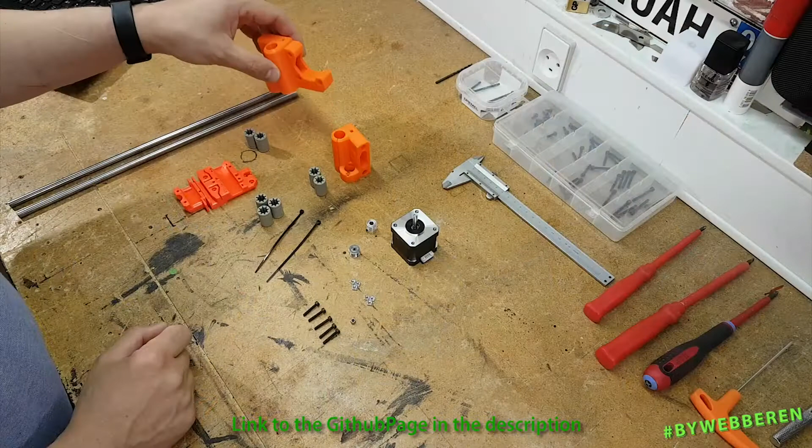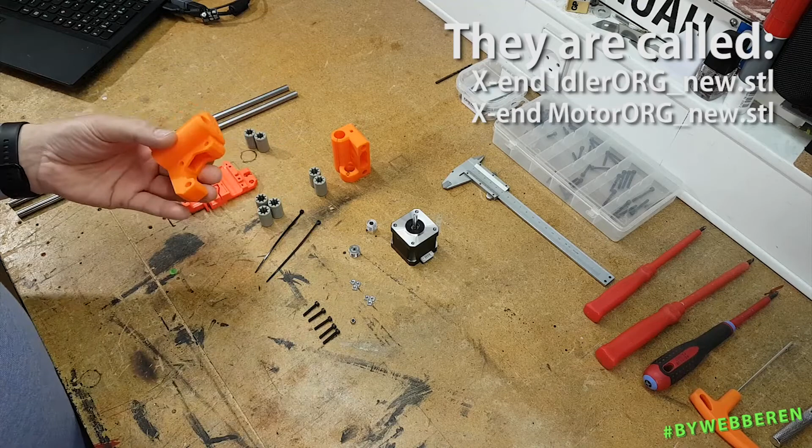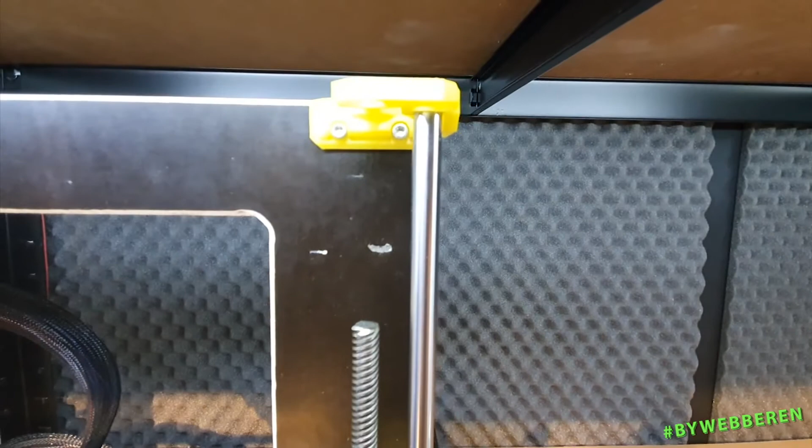I want to mention that these parts are the newest versions, just redesigned yesterday. On the original DADSON Prusa, the first one, the yellow one, I've used these. The difference is the mounting of the brass nut, which on this version goes in through the bottom, simply because my lead screws for the first version weren't long enough. But for this build we got the correct length of lead screws, so we don't need to use these old versions. These are the ones we're going to use today.

Unfortunately I didn't have enough of this kind of orange color, and I gotta tell you, it's triggering my OCD like crazy, but it'll just have to do. Oh, we need that part. So we're gonna put this aside.

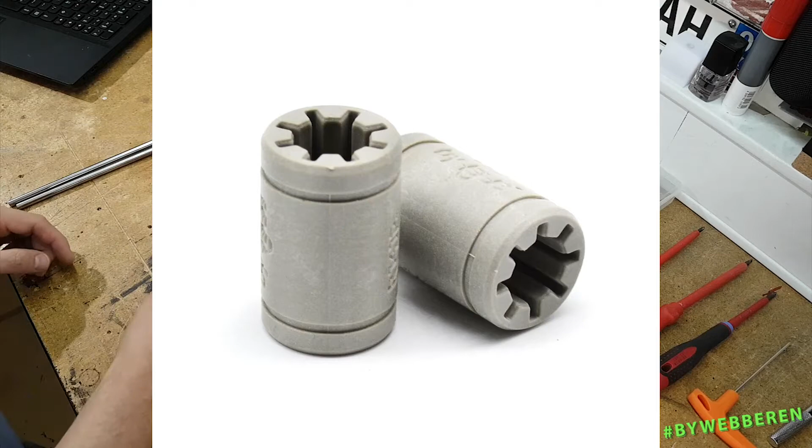I've decided to try and make the entire orange DADSON Prusa with the IGUS drylin, but of course you can also use these, the normal linear bearing versions. It's totally up to you. I might end up going back to these, but for now I'm going to try these original IGUS drylin bearings.

Okay, for the X-axis we will jump to step 2 and make sure we have it all, these two. For these, let's put everything else aside for now. The idler, one of the M3 18mm, and of course the nylock self-locking hex nut. If you notice, these have a kind of a lip on the top piece, which is of course the bottom piece.

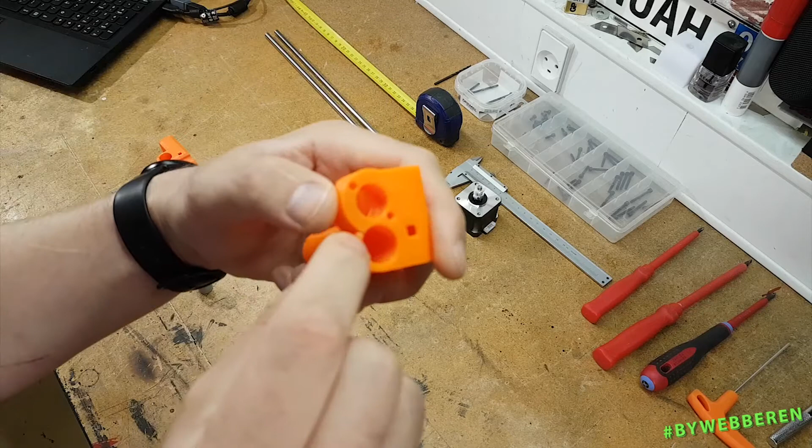Don't try to push the linear bearings in that way, you're gonna destroy the part. They go in from the side they are printed on. Also, there's a little piece right here that I just removed with a knife to give it some wiggle room in this piece, which is obviously what's locking the LM8UU bearings down.

Okay, I want to do this the best way possible, so I'm gonna take the actual rod that's gonna be used, push the first one almost to the bottom, make sure it's sitting tight, put this through. Now what I want to do is make sure that this, when it falls down, goes straight into the hole. That way I know that my alignment is correct.

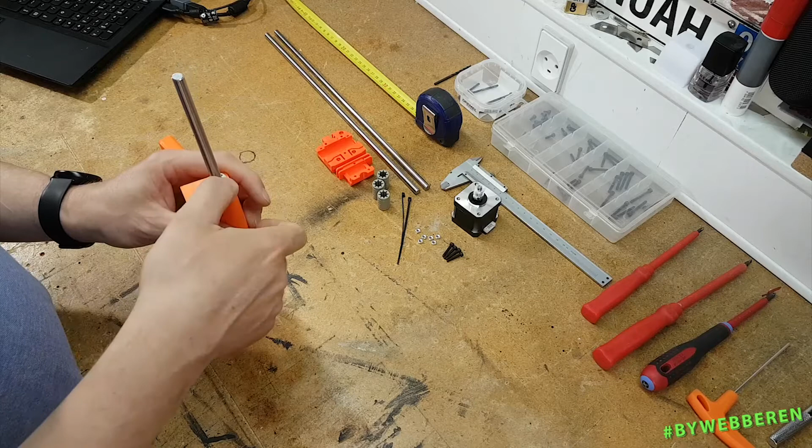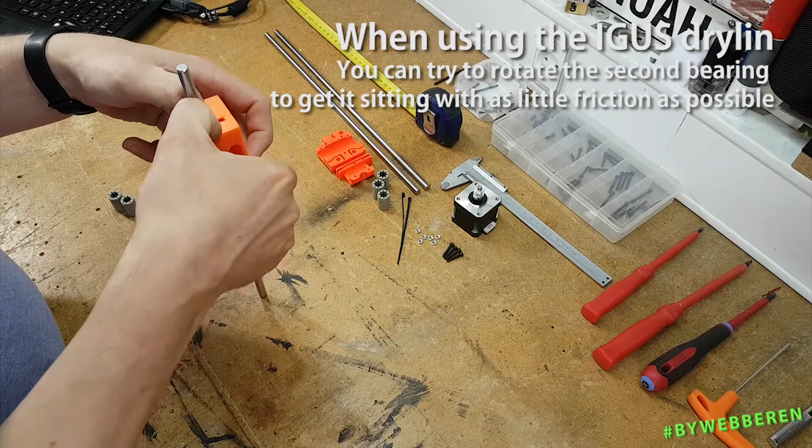Yeah, it moves, you can try to rotate it. Oh, that actually worked. If you rotate and find a better spot, keep it there, put it in. Yeah, that's very nice, and I don't have any problem getting it on and off. So that's one.

Same thing applies to the other one. Push the LM8UU bearing to the bottom. Give it just a light squeeze so it doesn't get squeezed too much by this piece right here. Very stable, yeah. Okay, so that's the bearings in.

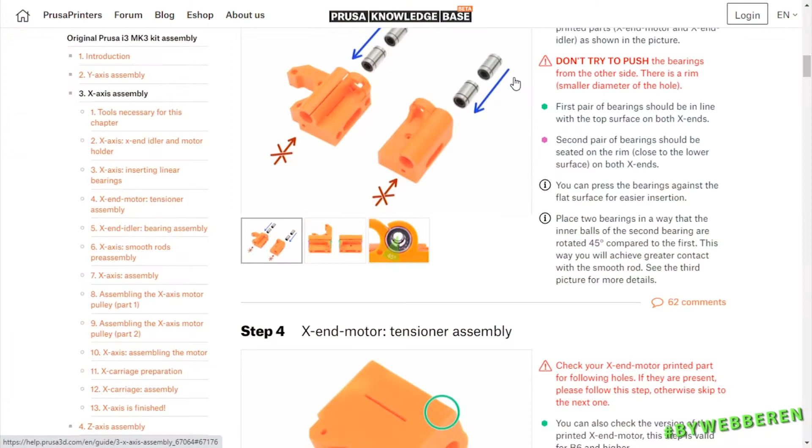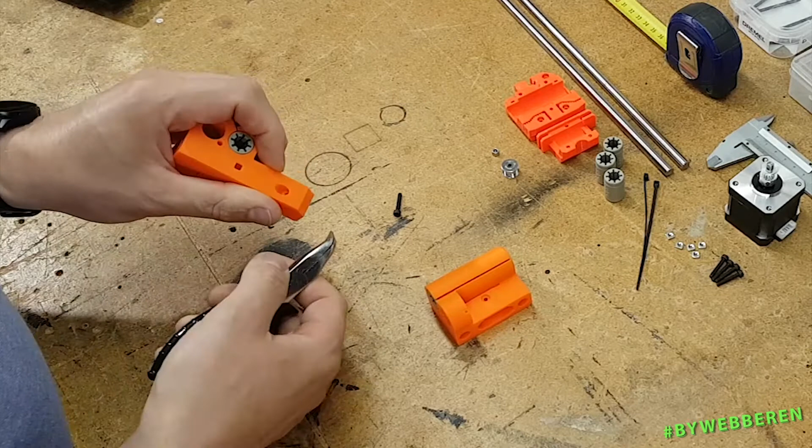Okay, so we are going to prepare the motor piece, the motor mount piece, and one of the 18 millimeters and one of the square nuts. Yeah, there it is. You need to push this in as far as you can, like that. Then it will line up perfectly with the hole for this 18 millimeter M3 bolt.

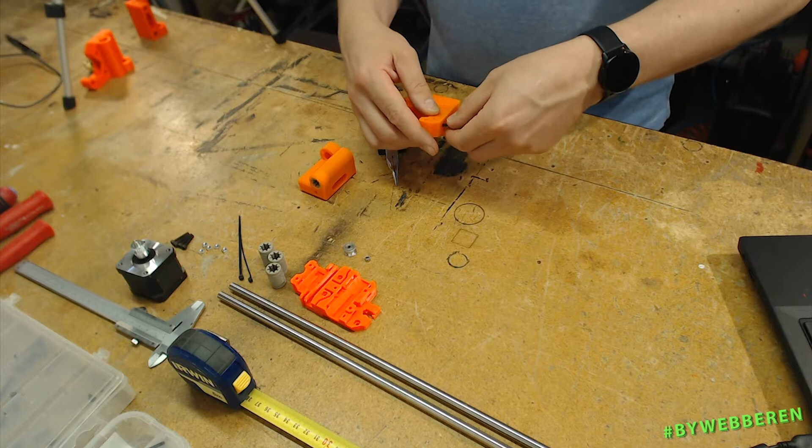Let's just make this ready for the motor tension. You can barely see it in the hole right now, so just one more step.

It's time to work with this one. We need the nylock nut, goes on this side. Oh, before I forget...

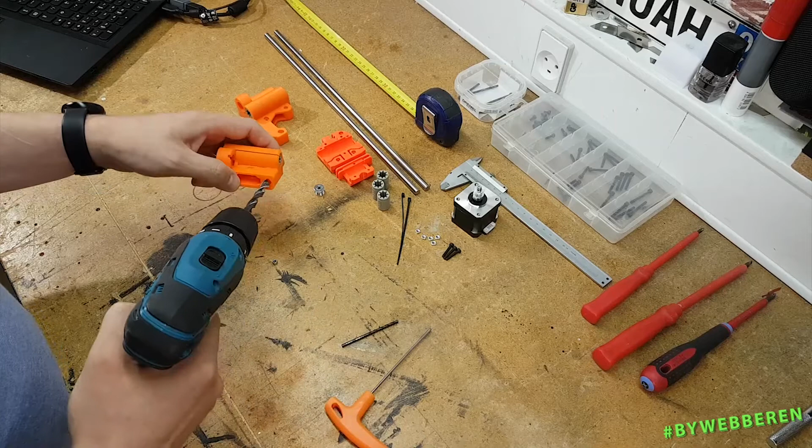When you print any of the parts, it can be a good idea to drill them up. This is an 8 millimeter drill, which has been used for these holes where the rods go, simply because it's not easy to print a perfect round hole when it's in this orientation. So it can be a good idea to just drill it. Don't overdo it, because you don't want to make the holes so big that it wiggles in there. But I am going to take my 3.2 millimeter and make a hole there.

Just a quick tip: if you can't get your self-locking hex nut to secure in this part, you can use your soldering iron. You can just use a normal M3 hex nut, put it in as far as you can, and then melt it in the rest of the way.

Be sure not to burn anything on the part, and just let it sit.

Then afterwards we can just pop it out. Like that.

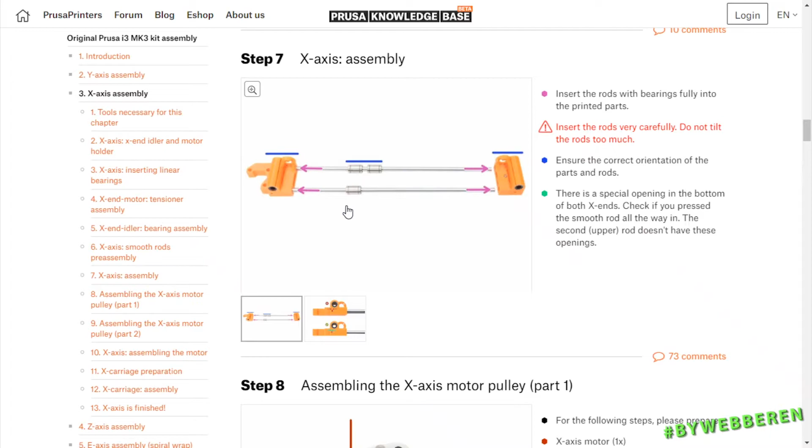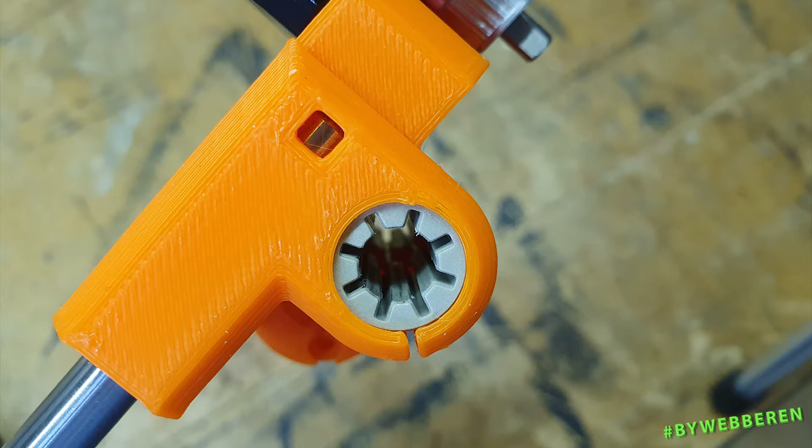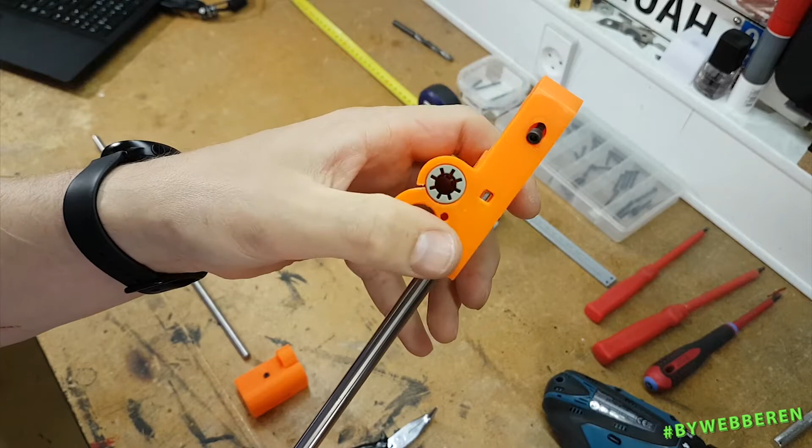On the original of these parts, there is a hole in only one of the sides, which I don't really understand, but I made holes in both sides now, so you know when it's all the way in, and you can see the rod through the hole. It's a clever thing, I know.

See, this is all the way in.

Okay, now I need to remember to make sure that these go on correctly.

There you go. If you decide to use a hammer to put these on, be very careful not to crack the printed part.

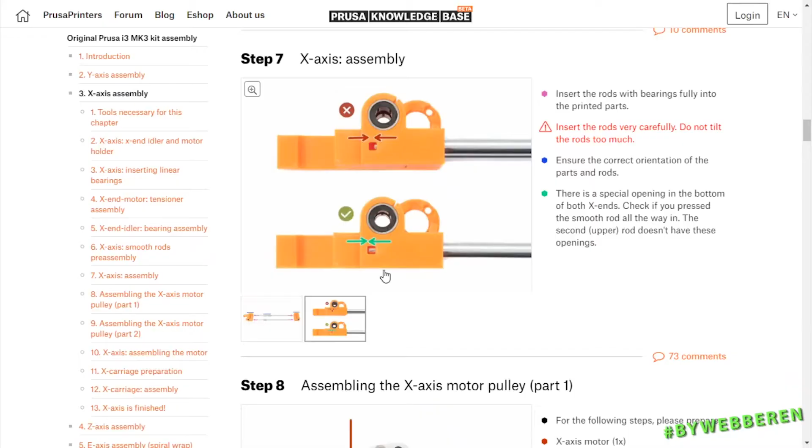Next we need the stepper motor. Oh, and the pulley. You should always go for stepper motors that have a flat surface on the shaft. That makes it so much easier when you mount stuff on them.

Mount this and don't put it all the way in here, which makes sense. This, like on the y-axis, will also be tightened all the way down when we get to the next step.

Prepare 3 M3 by 18 millimeter bolts. That's very good because we only have 3 left, and we need to mount it like that. No big surprise there.

At this point you want to make sure to have your stepper motor oriented the correct way, which for me means I want my wires facing downwards, and this bottom

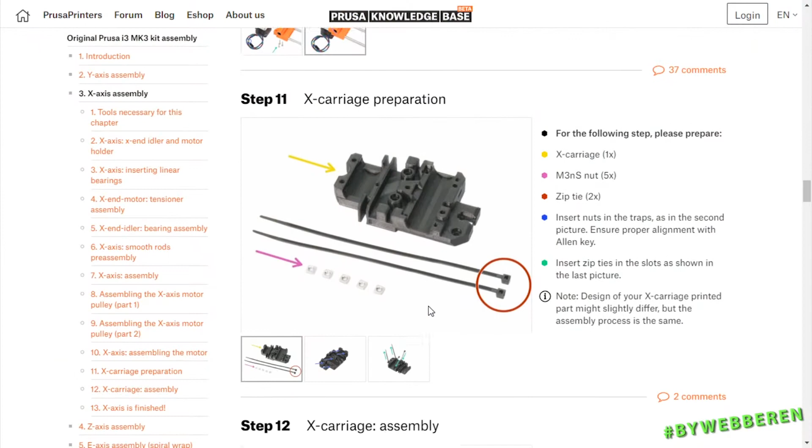Now it's time to prepare the X carriage. That's that baby right there. We need 5 of these square nuts, S nuts, and the zip ties, and that's the final pieces for this.

Okay, so we have these slots which should perfectly fit for these. It's not easy with big fingers, but

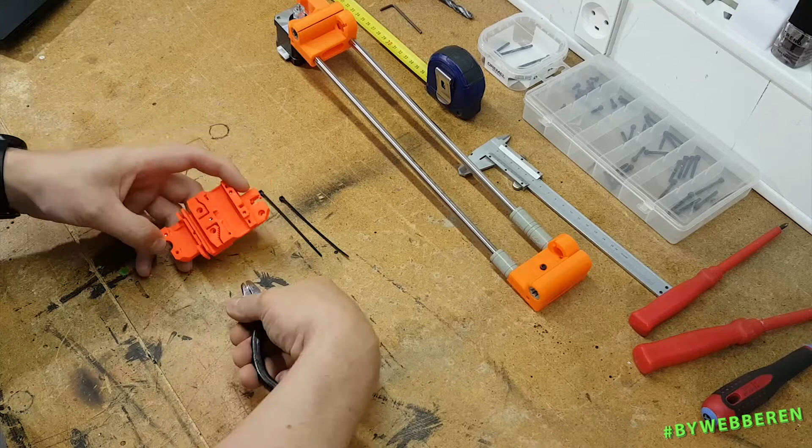I don't know if it has anything to do with performance, but on the manual they are started on the middle part and go through like that.

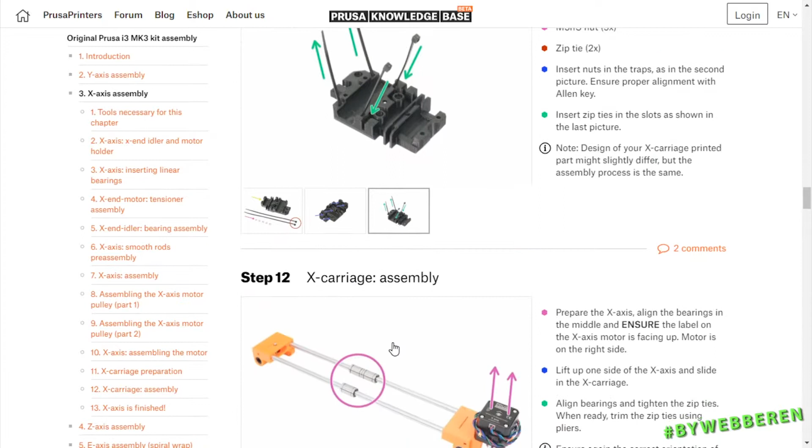This is where the hot end and the extruder part will be. Okay. Now we put those things together.

Okay, that seems simple enough.

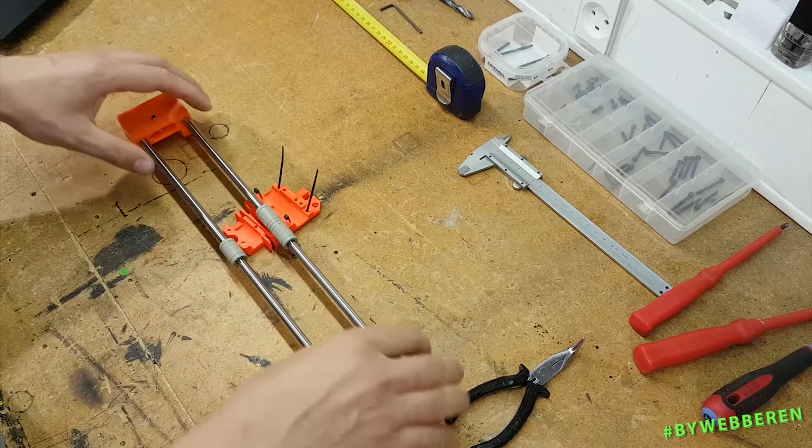And I guess the next part is just to remove those, and then the x-axis is actually finished. A very important part of the build is done.

Okay, so when you're done, it should look something like this. And as I said, this is one of the pieces that are built almost exactly

like the original manual. Okay, you guys, that's the x-axis done.

Now it's time to look at the next part of the build, which will be the z-axis. This is where the printer starts to look like a real 3D printer.